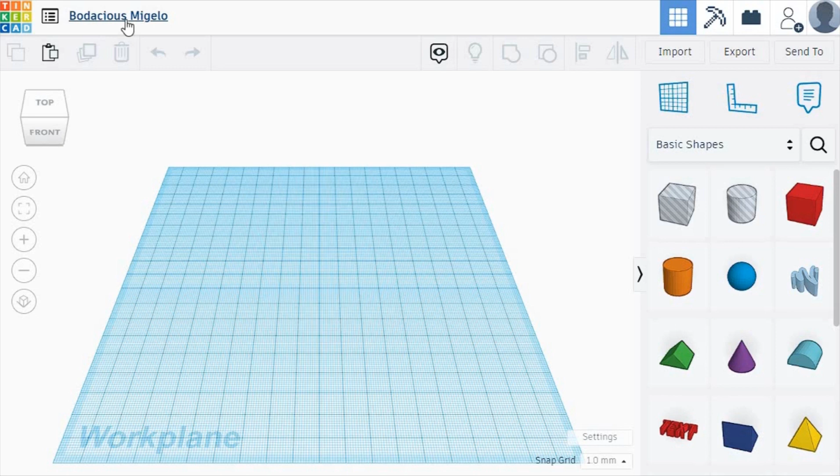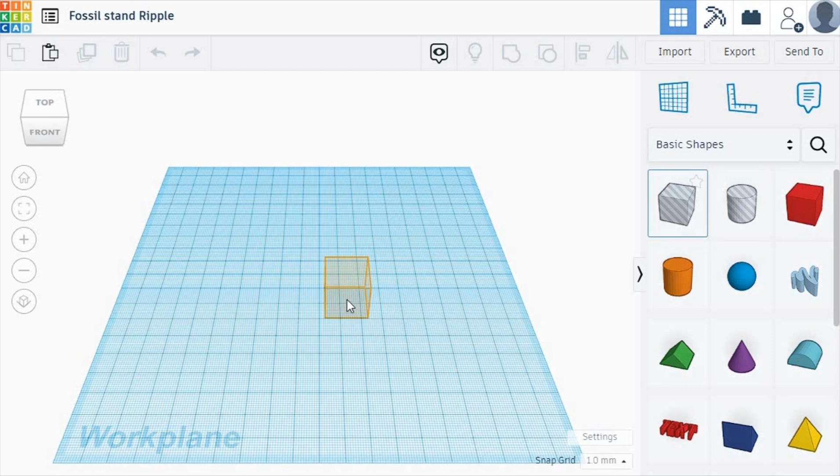Okay, so let's move to Tinkercad. We've opened Tinkercad and started a new 3D object. The first thing we're going to do is retitle it to something relevant to our fossil. And I'm going to do this a little strangely. It might not be very intuitive for you, but you'll see where we're going eventually.

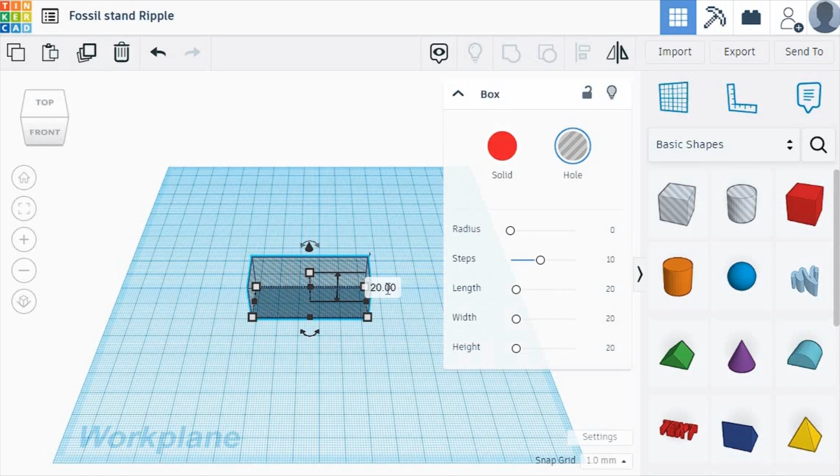On the bottom, if you remember right, we measured 5.5 centimeters. This is in millimeters, so we'll go 55. The thickness was already about 2 centimeters, so we're good there. To change the height, we click these vertical vertices and type in our height of 65 millimeters, or 6.5 centimeters. So what we have here is a hole square, roughly the shape of our fossil.

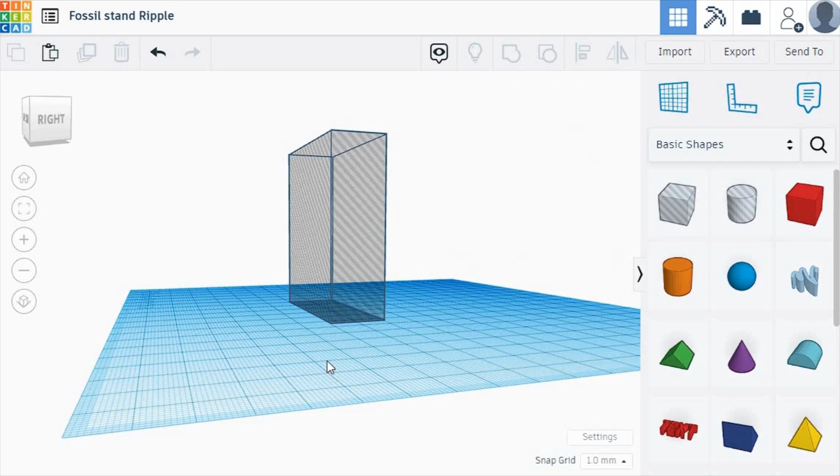The next thing I'm going to do is imagine the holder that I showed at the beginning of this video here, and that shows you where I want to go. What I'm going to do now is duplicate this.

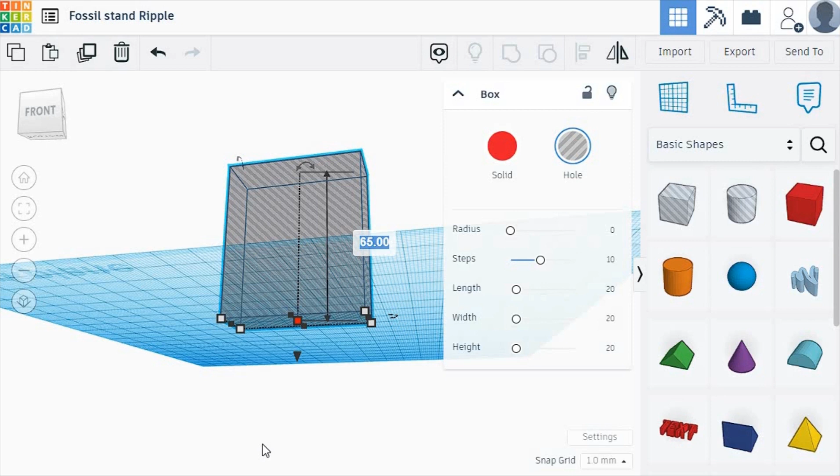I'm going to change the angle a bit so we can make this top vertices show up on the bottom. I'm going to take off about 2 millimeters, so we'll go 63, and then make it a lot longer. Imagine that this is just this window where we can see the fossil in the stand. There's nothing actually there—this is just empty space, and it's making sure that nothing ever enters that empty space.

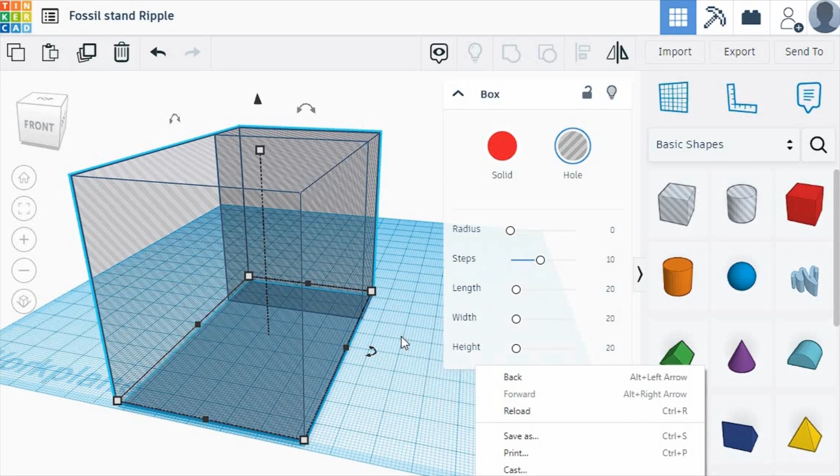We use the left mouse key, click and drag, and highlight so both objects are selected. Then we click this button up here, which is group, or press Control-G on our keyboard. Now you can see we have this new hole.

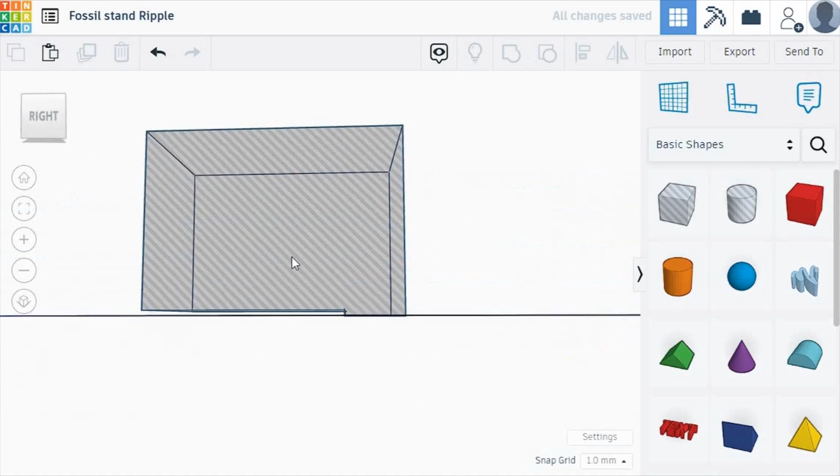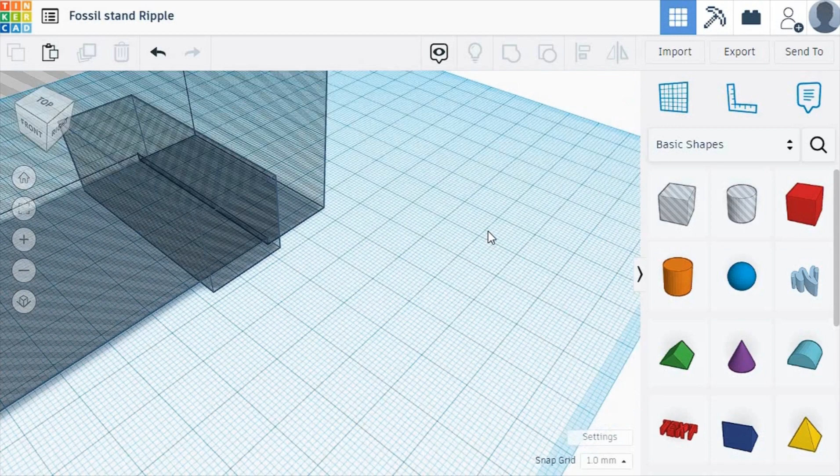I'm going to do one other thing here. I'm going to make this again 55 wide, and this is just going to be for the nameplate. So if you look here, we're not quite centered with our whole object.

So we select both of them, click this button to align them, or press L on our keyboard. And that's all the alignment I want to do.

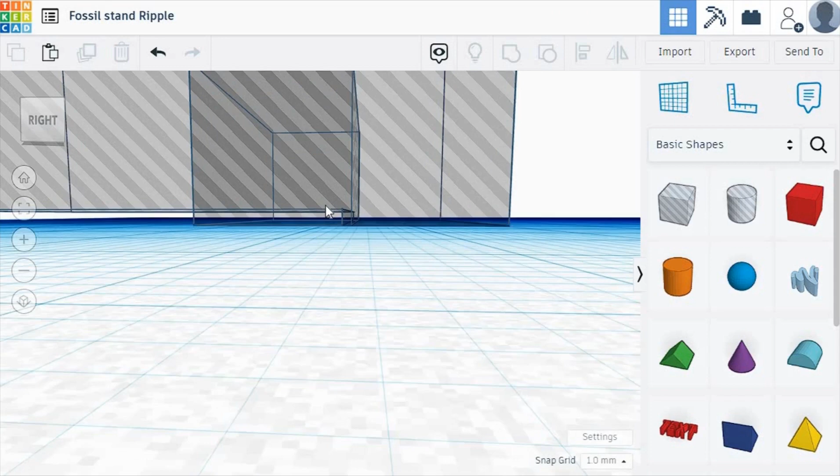So look here, we can select our object, move it here. Now it's lined up. Our snap grid is set to 1 millimeter, so if we're using our arrows on the keyboard, we can move it 1 millimeter with each press. We can change this interval to be whatever we want here—off is some distance below 0.1, but I like 1. So I want this to be, we'll go with 2 millimeters.

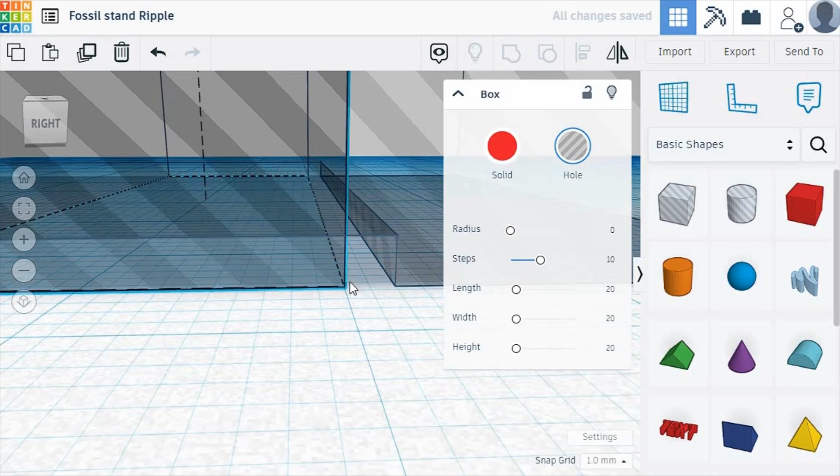And I actually want this to go lower. So we can just drag this down infinitely because there's not going to be anything there. And this is our little latch that's going to hold the fossil piece, which again is imaginary in this square here.

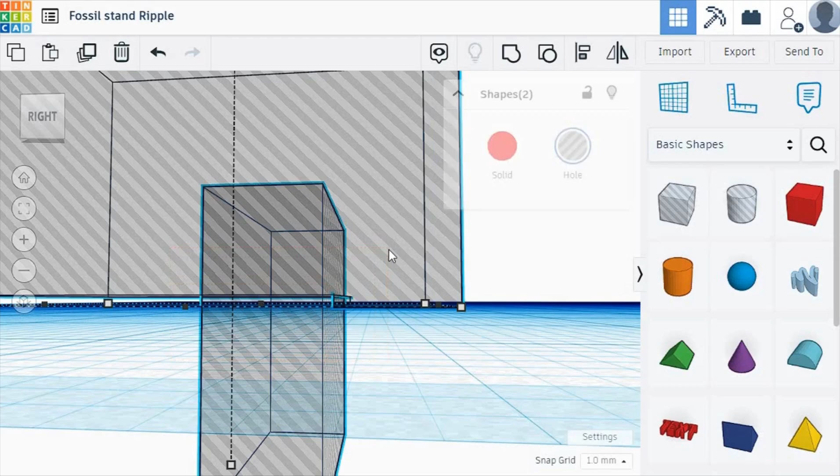Highlight both objects again, and now we have this really odd shaped hole. But remember, the only important part is actually here and here.

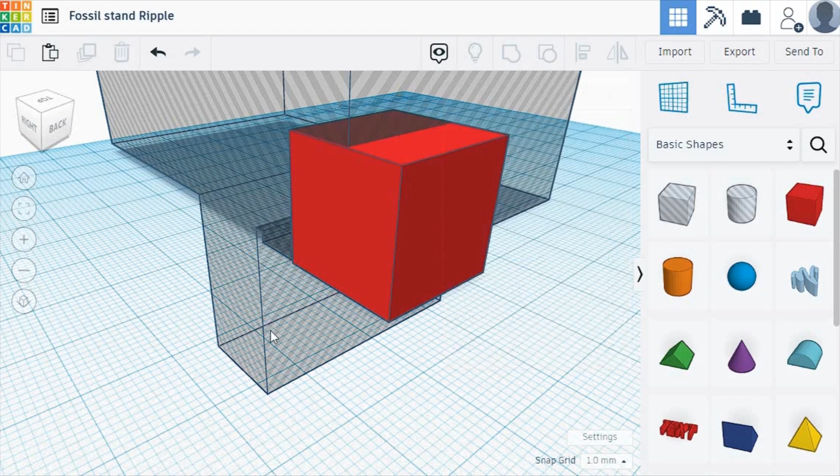So we take a new square, which is a solid object. We're going to make it 55 wide again, and again center it by highlighting both, pressing the Align button, and centering them.

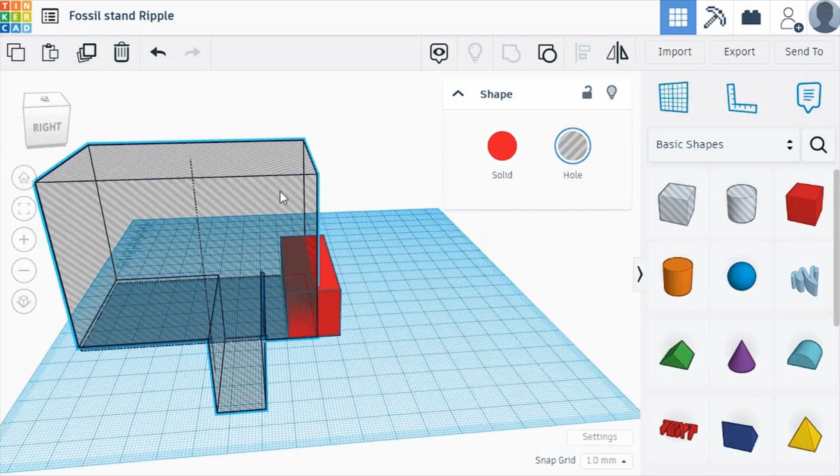The next thing I'm going to do is I'd like the fossil to be tilted backwards a little. So to change the angle, we have this arrow here. If I can get it to work—there it goes. So we can click it and drag it in either of these two circles. See, this inner circle, highlighted blue and red here, is a snap circle to go to common angles you might want to rotate to.

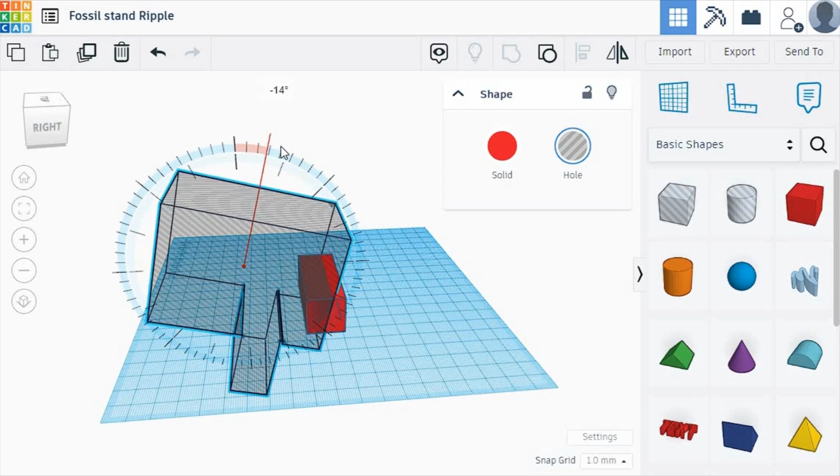I just want to rotate back 10 degrees, so we could do it in this outer circle here, or if you don't want to fiddle with that, you can just click on the amount of degrees and type in the angle. Oops, it went backwards, so we'll go -10. And that's what I wanted.

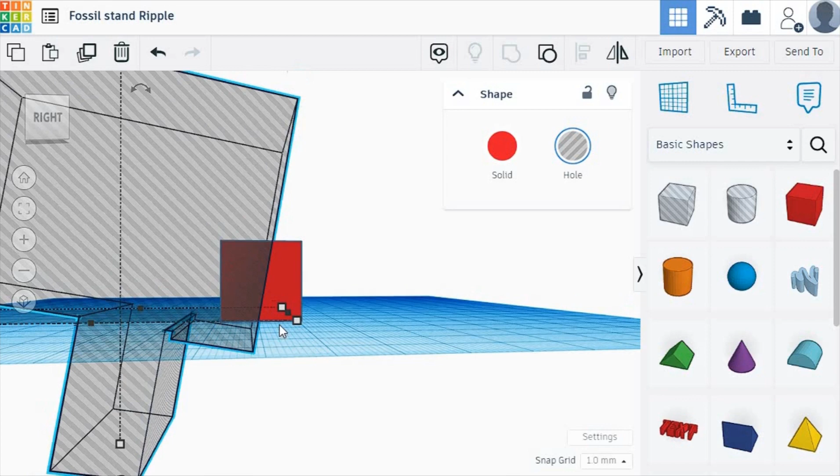I want to drag this up so that this corner is just 2 millimeters above the bottom of this surface. Right now, that's about perfectly at the bottom. You can see this is how much we just moved it by dragging on this arrow.

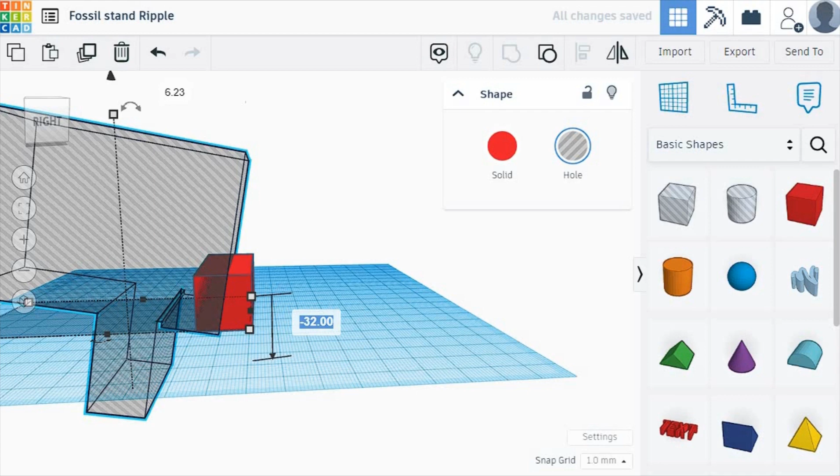I want to go 2 higher, so we'll say -32. Oops, I'm sorry, -28. That's about right.

So we click here. By the way, whenever I'm moving this way and moving the whole image plane, you do that by pressing the scroll wheel on your mouse and dragging.

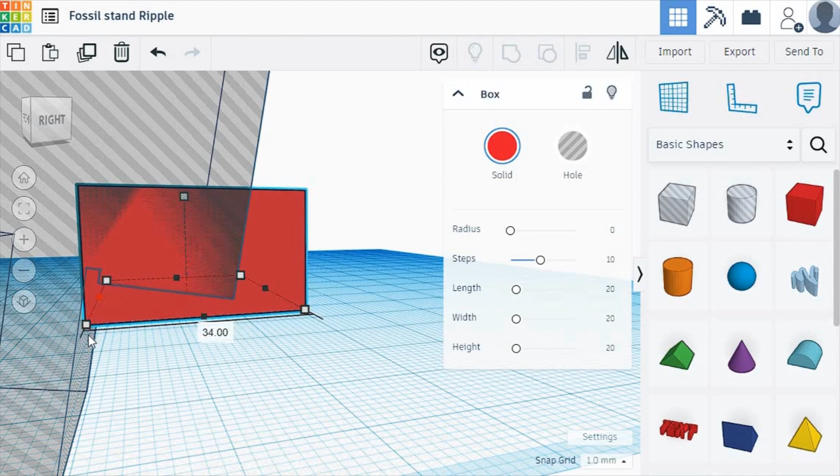So now we're going to drag this forward a little, just so it's all the way into the hole here. Now I'm going to use this vertices to drag this upwards, and I'm going to make this just a little thicker.

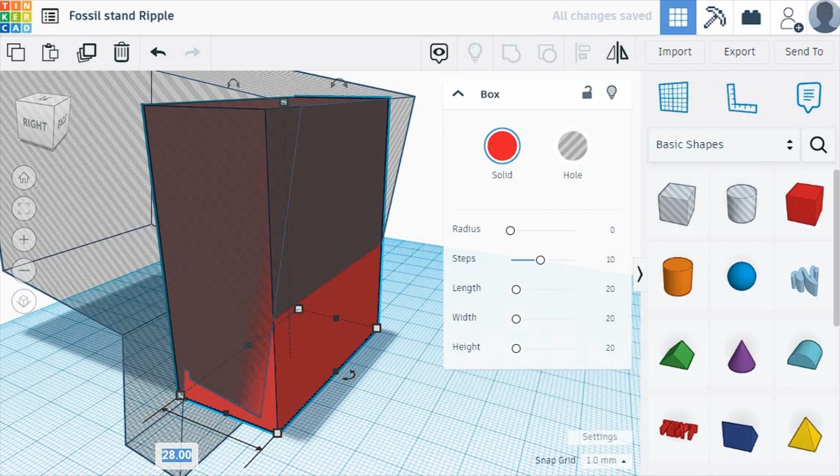Well, what did I do there? 28. There we go. Give it a nice flat top. And that's about what I want for a fossil stand.

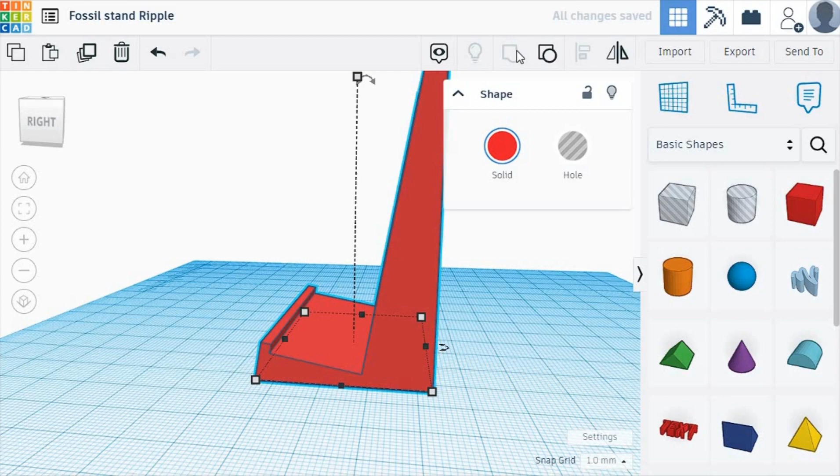So select both objects, combine. Again, this button here for combine group. And that's a good fossil stand.

But now let's say that I wanted a little nameplate here, or something that I could slide a piece of paper into. We're going to take our box again, our solid box.

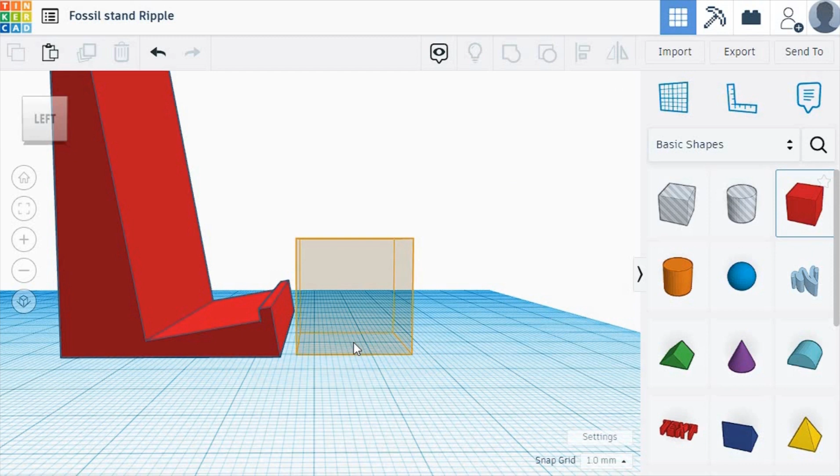Let's call it 3 millimeters. I'm going to drop it down a bit.

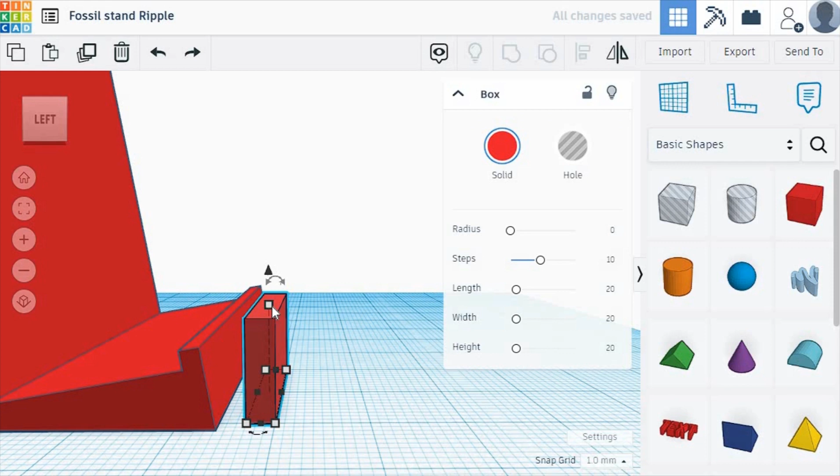So I'd like our piece of paper to be about 5 millimeters. So we're going to call this 6 millimeters, and we're only going to make it 1 millimeter thick. And again, our complete width is always 55.

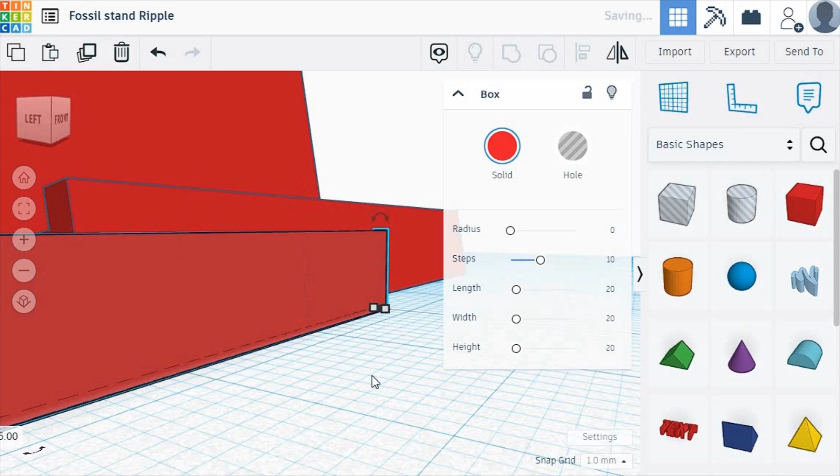Recenter it. Now what I'm going to do is I'm going to change it to a hole by clicking here after we selected the object. I'm going to duplicate it again here.

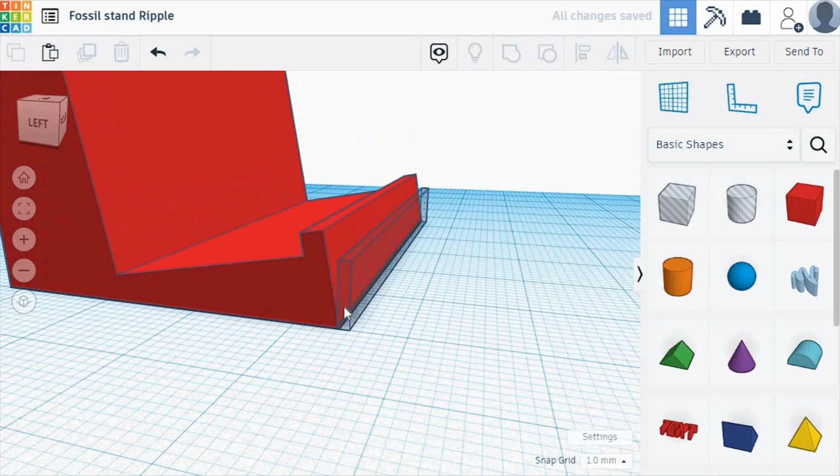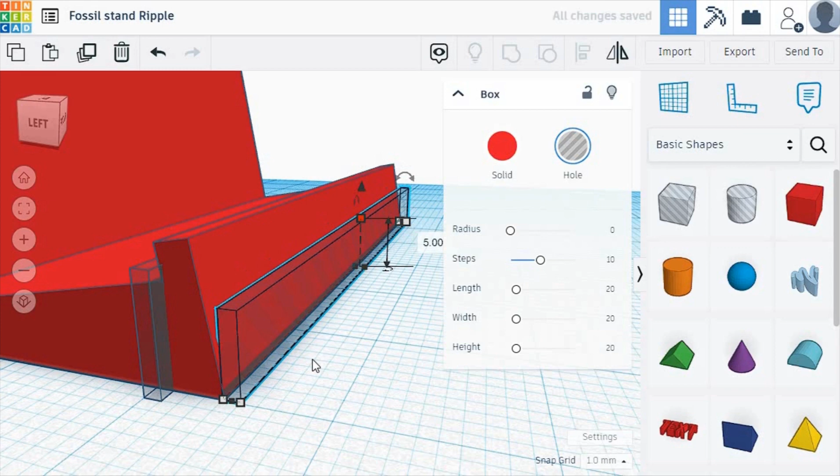Hit 6. I'm going to have a 1 millimeter lip on each side. So actually, let's change this to 7. And then we'll take our duplicate and we'll change it to 5. So it's actually going to be a 7 millimeter lip, or a 5 millimeter piece of paper.

And we can make this as wide as we want. Whoops.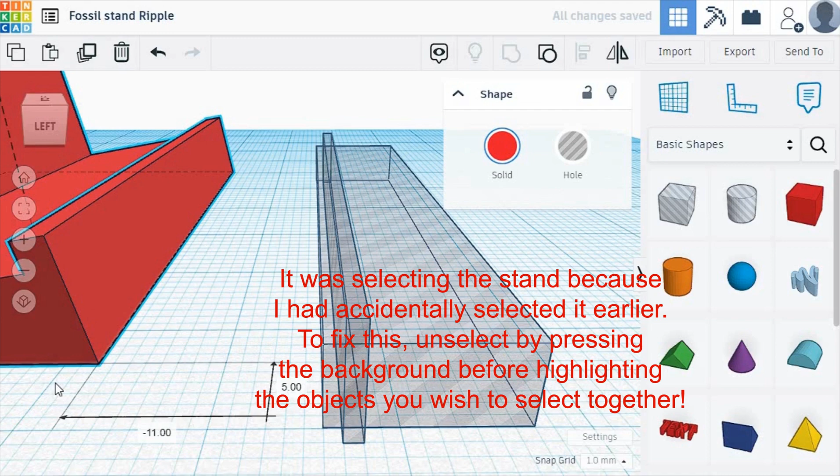Okay, for some reason it was selecting this object even though I wasn't highlighting it. That's just, I'm guessing, a bug in Tinkercad, unless I didn't understand what I was doing there.

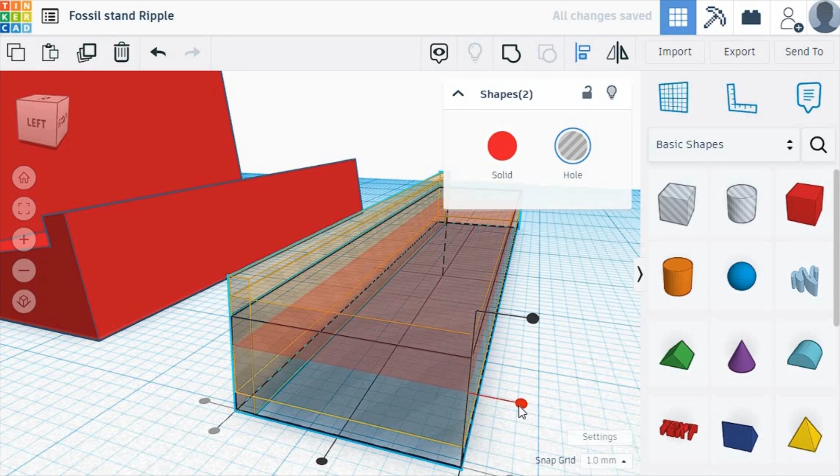We can just drag over these two. I'd like to center them, put them on the back wall, and center it vertically. So there we go. That's the slot we're going to cut into this piece here.

Oops. Okay, I see. The corner just barely covered it, and that's what got this back object. Make sure to only get these two in there. Group them. And there's our new hole.

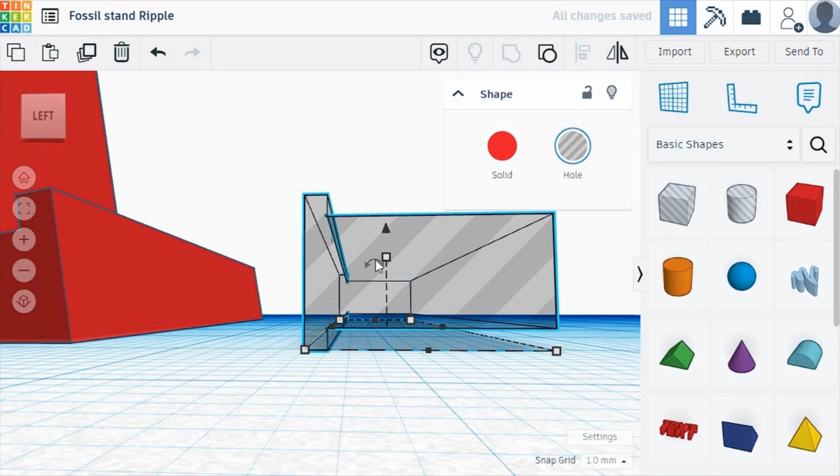If you remember right, we were tilted this way 10 degrees. So -10.

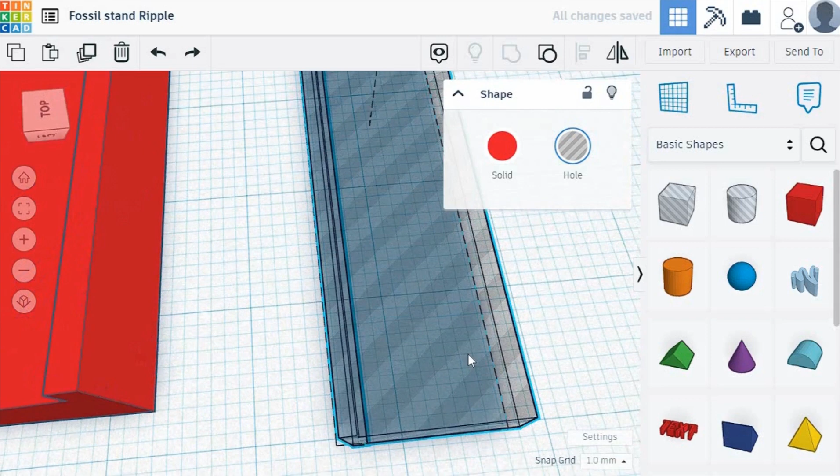Okay, so this is a weird angle, and trying to drag it to the left sometimes doesn't work. So just choose a different angle. Make sure you're centered.

I'm going to lift this just up a little bit. I'm going to turn Snap Grid off because it's not helping me right now. This will just let you move it with a little bit more fine control now.

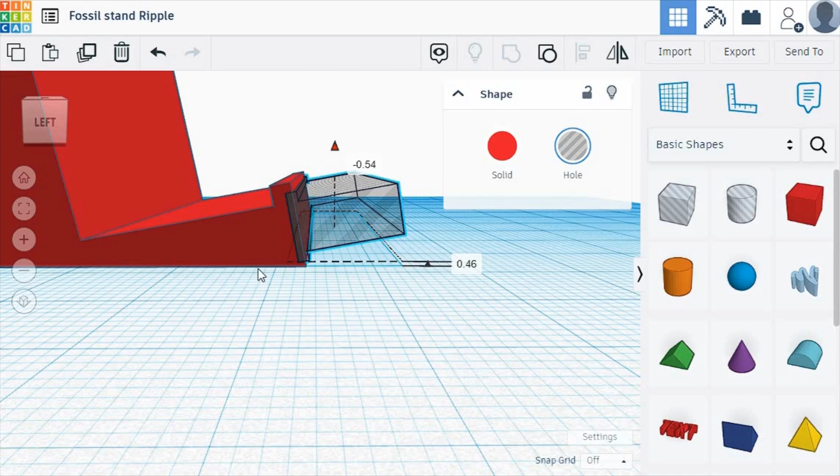So I'd like to get this more or less centered on this post. We're going to click it now. Hold the left arrow just to move it in. I'm going to get it lined up right there.

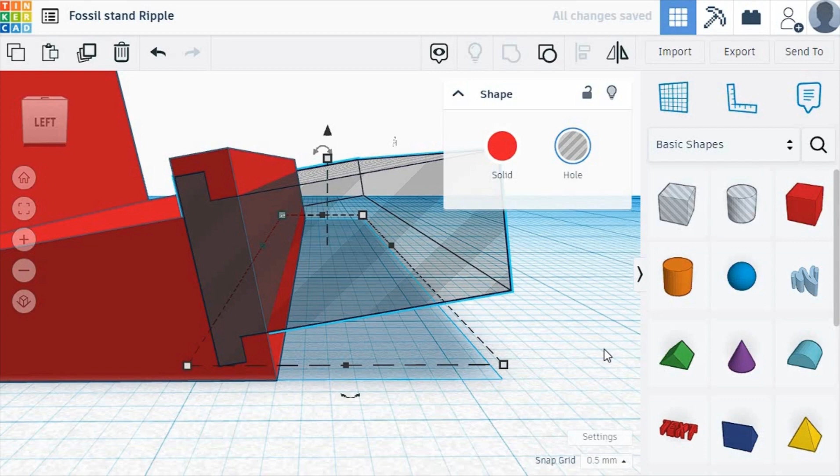I'm going to change my Snap Grid back to 1. Okay, that's too far. So I'm going to change it back to a 1/2. And that's where we'll put the little paper slot.

So now combine them, or group. And there's a little slot for a paper label to go in.

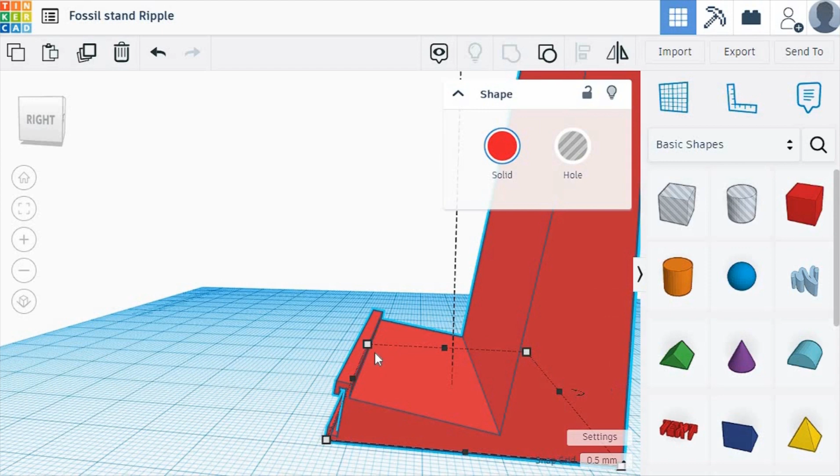To export this file, make sure it's highlighted. Click Export and select STL.

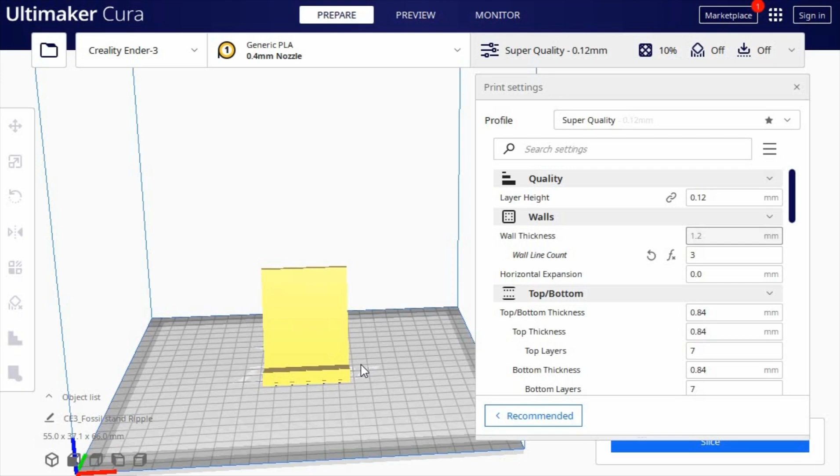Okay, so we have our fossil stand imported in Cura. I just want to give you a quick note on how to do this. If it's sitting this way, it's not actually going to print great, and I'll show you why here in the preview.

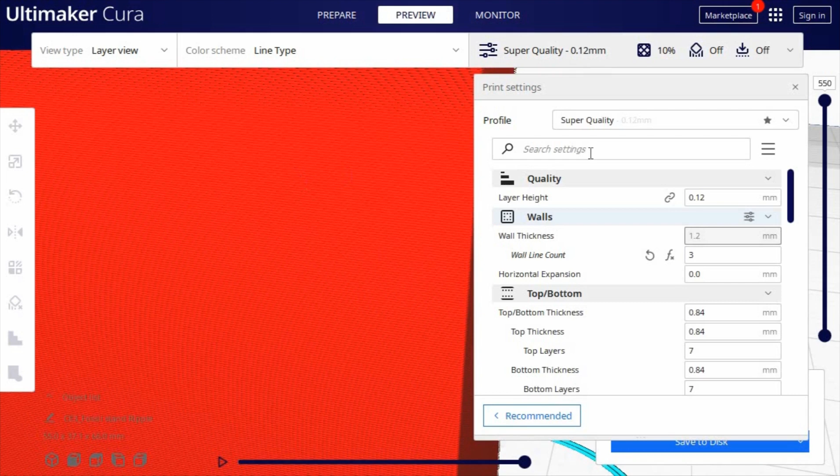So our layer lines are going this way. They're a bit hard to see. Let's change it to low quality to make it more obvious.

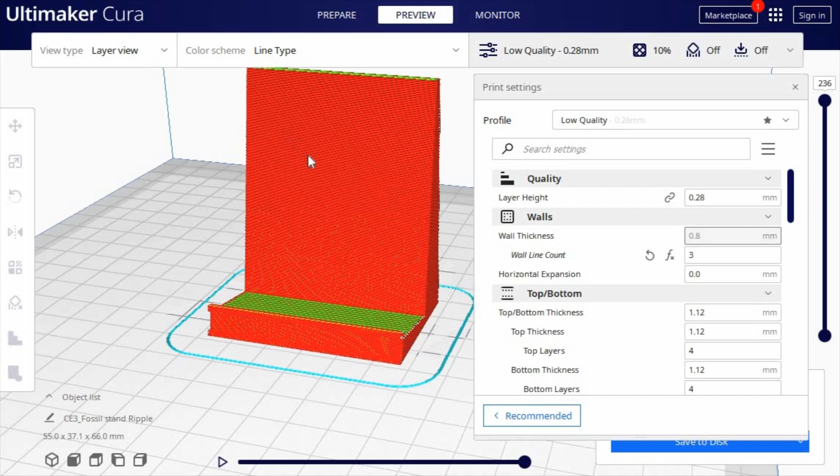Alright, so we can see our layer lines are going this way in the stand. And if you imagine the fossil sitting here, there's going to be a force pushing back on this wall, pushing this way. Anytime a 3D print breaks, it's almost always going to be on these print lines. So the top half of this might just snap back and let your fossil fall. With light fossils, it's probably not going to be an issue.

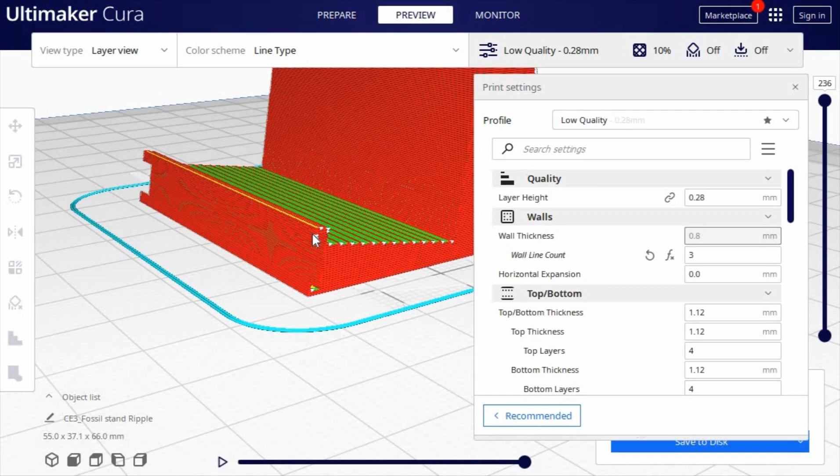The other thing is with this, the label holder, there's no support for this part, so that would fail. So what we want to do is we want to rotate it that way.

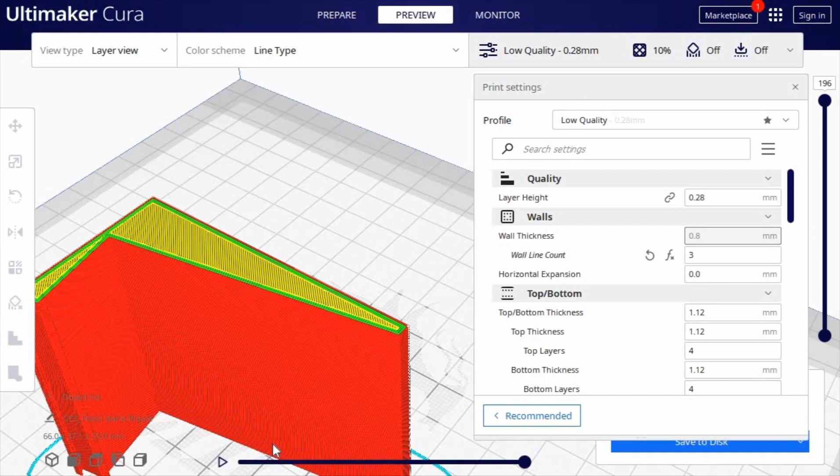And so now the layer lines are this way, and when a force is pushing this way on the stand, it's probably not going to break because there's no torque going across each side of the layer lines. If that makes sense, hopefully it does. But we can print this now, and we should have a nice working fossil stand.

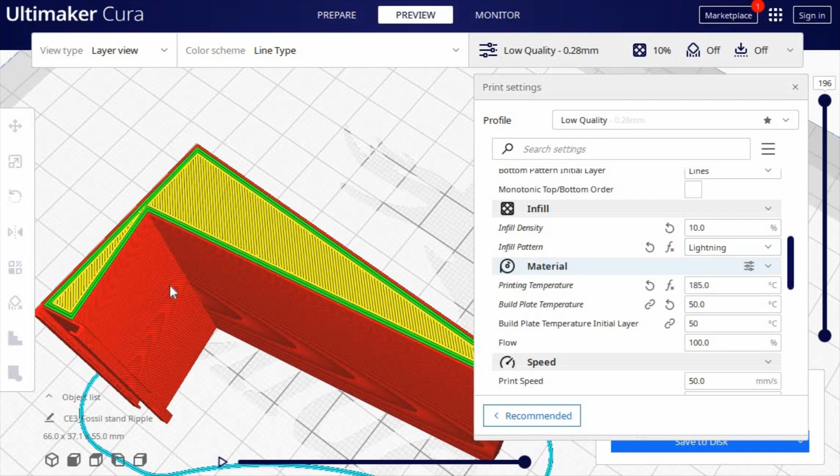Another thing is for light fossil stands, you don't actually need much infill, so I'm only doing 10% lightning infill and 3 walls. You don't actually need that much for a very light fossil. For more, you might want to go to like a gyroid infill or a cubic infill and a higher percentage, but for this one, lightning's plenty fine.

And that's only a 17-gram print.